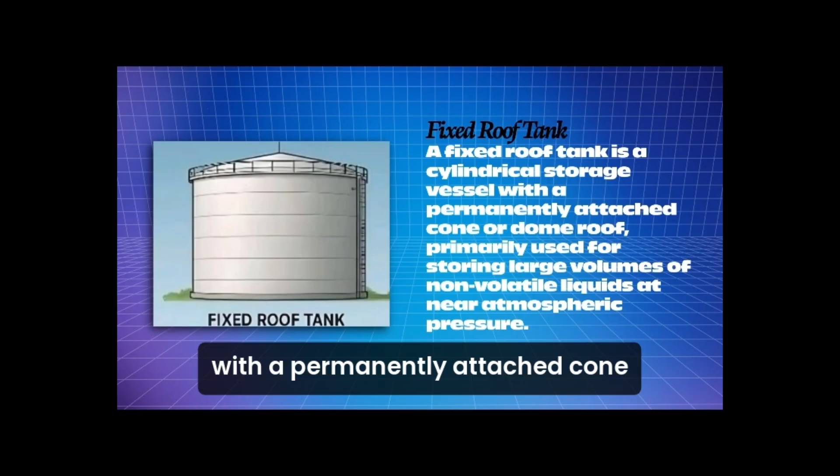A fixed roof tank is a cylindrical storage vessel with a permanently attached cone or dome roof, primarily used for storing large volumes of non-volatile liquids at near atmospheric pressure.

Application and usage. Its key application is in industries like petroleum, chemicals, and water treatment for storing products with a high flash point, such as crude oil, diesel, water, or certain chemicals. It is unsuitable for highly volatile liquids due to its lack of pressure sealing, as breathing losses can occur from vapor expansion and contraction due to temperature changes.

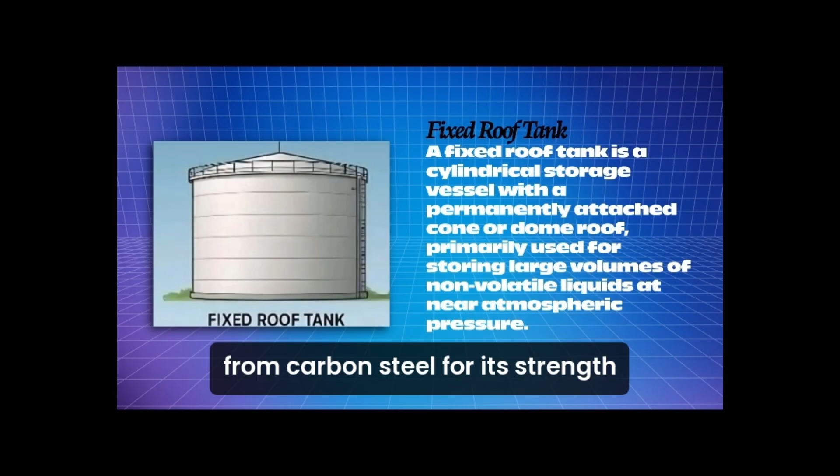Materials of fabrication. These tanks are almost exclusively constructed from carbon steel for its strength and cost-effectiveness. Stainless steel or special alloy linings are used for corrosive products. The roof and shell are typically welded steel plates, and the tank sits on a reinforced concrete foundation.

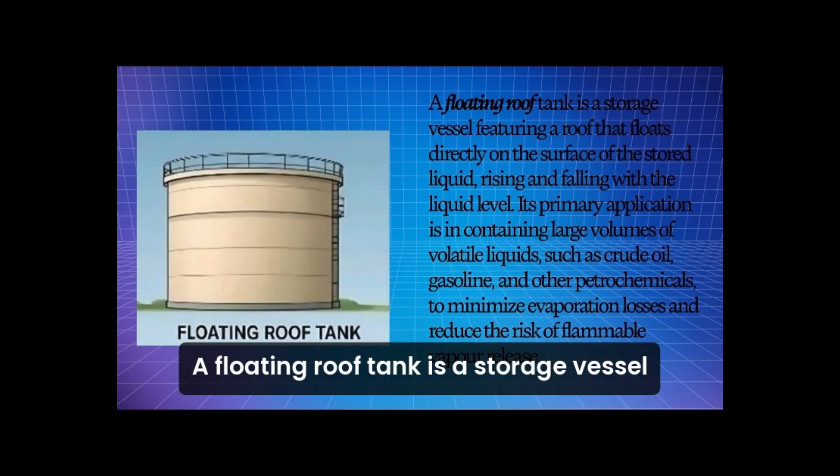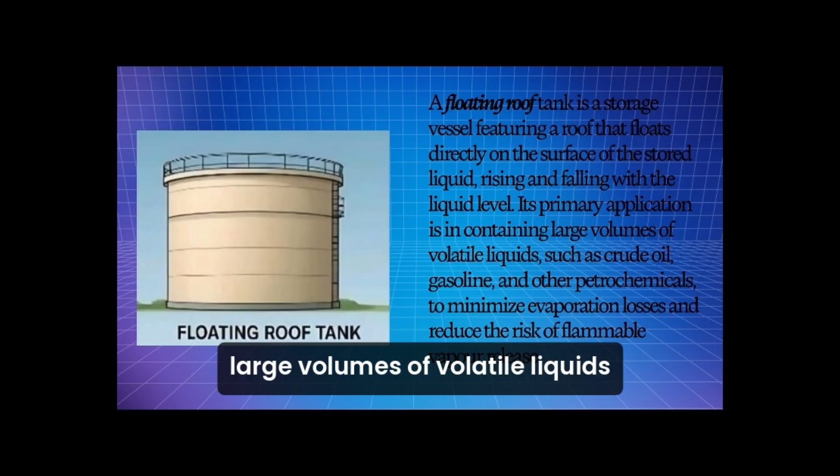A floating roof tank is a storage vessel featuring a roof that floats directly on the surface of the stored liquid, rising and falling with the liquid level. Its primary application is in containing large volumes of volatile liquids, such as crude oil, gasoline, and other petrochemicals, to minimize evaporation losses and reduce the risk of flammable vapor release.

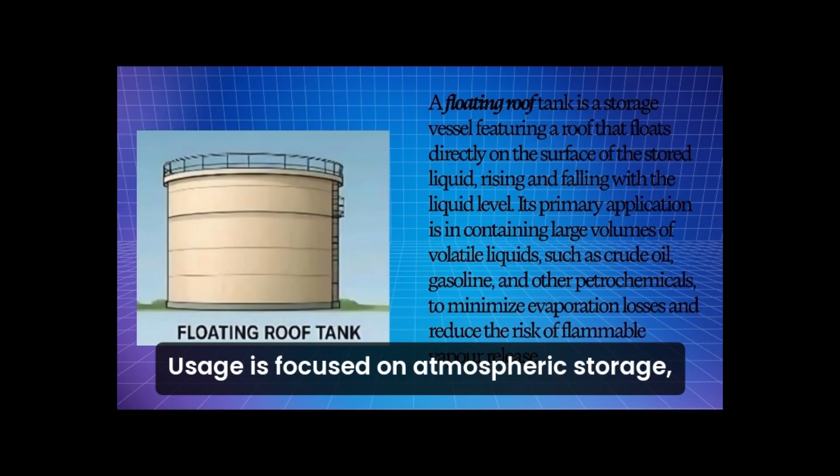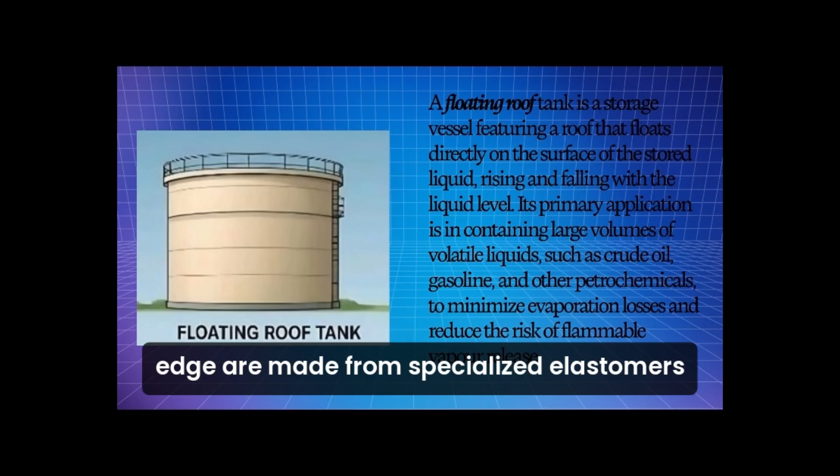Usage is focused on atmospheric storage, where controlling emissions and product loss is critical. The design significantly limits vapor space. Construction is predominantly carbon steel for the shell, deck, and pontoons. For corrosive services, aluminum or stainless steel roofs may be used. Critical seals around the roof edge are made from specialized elastomers or composite materials resistant to the stored product.

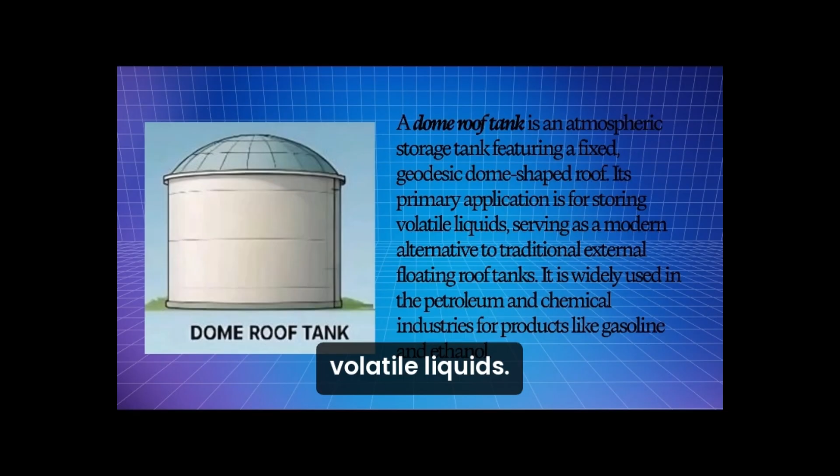A dome roof tank is an atmospheric storage tank featuring a fixed, geodesic, dome-shaped roof. Its primary application is for storing volatile liquids, serving as a modern alternative to traditional external floating roof tanks. It is widely used in the petroleum and chemical industries for products like gasoline and ethanol.

The key usage advantage is its enclosed design, which significantly reduces weather-related product loss and emissions compared to open-top designs, while avoiding the maintenance issues of internal floating roofs. The tank's main shell is typically constructed from carbon steel. The dome itself is often fabricated from lighter materials like aluminum or glass-reinforced plastic, GRP, to reduce structural load, supported by a steel framework.

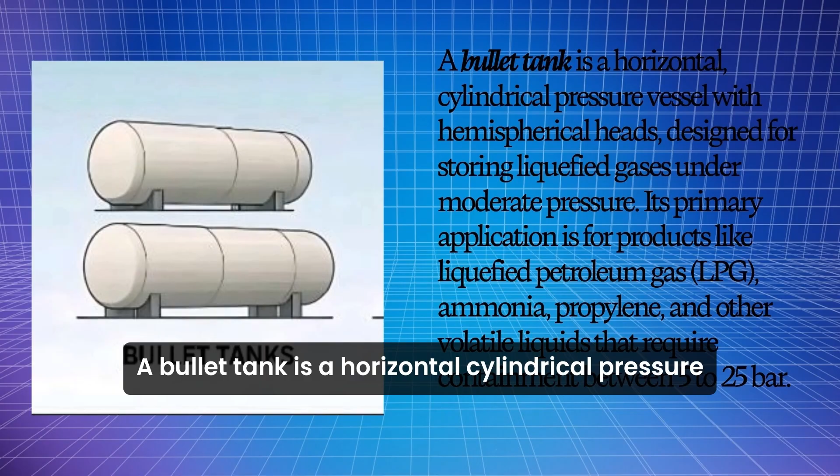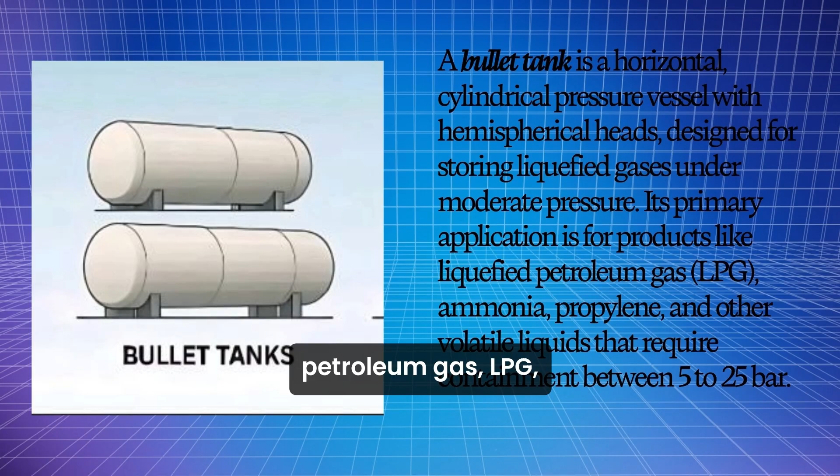A bullet tank is a horizontal, cylindrical pressure vessel with hemispherical heads, designed for storing liquefied gases under moderate pressure. Its primary application is for products like liquefied petroleum gas, LPG, ammonia, propylene, and other volatile liquids that require containment between 5 to 25 bar.

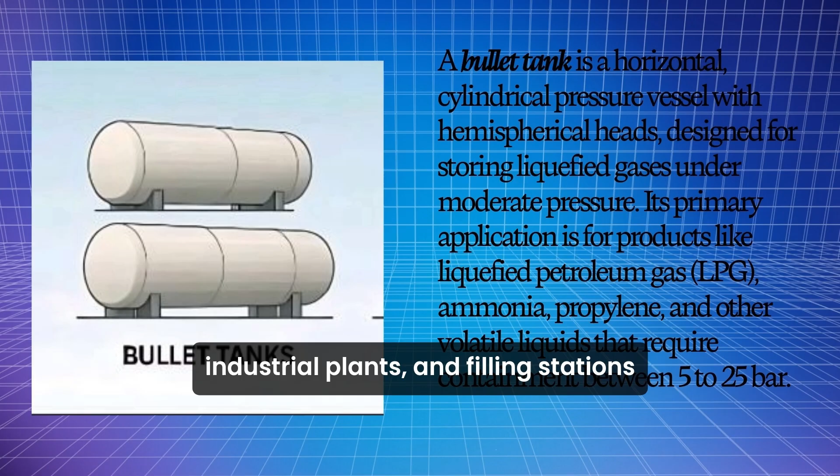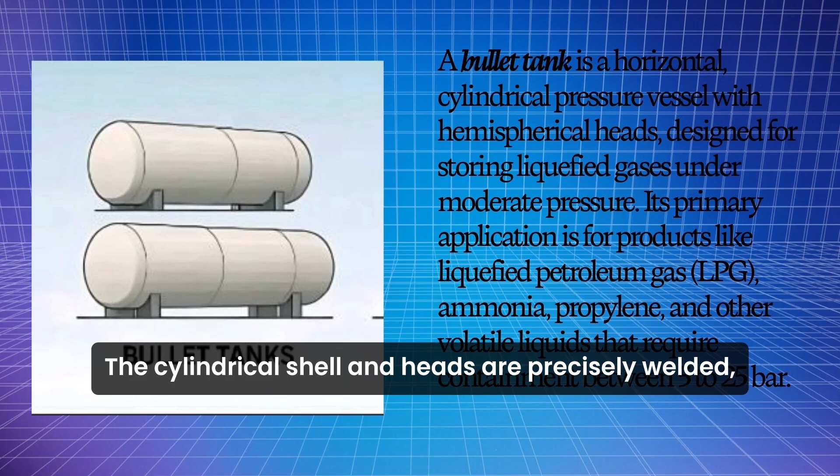These tanks are used in distribution terminals, industrial plants, and filling stations where smaller, pressurized storage is needed, as opposed to large atmospheric tanks. Fabricated predominantly from high-strength carbon steel or low-temperature carbon steel to withstand internal pressure and prevent brittle fracture. The cylindrical shell and heads are precisely welded, and the entire vessel is often mounted on saddles to accommodate thermal expansion and contraction.

A spherical tank, or sphere, is a pressure vessel designed for storing highly volatile substances at elevated pressures. Its primary application is in the petrochemical and oil and gas industries for products like liquefied natural gas, LNG, propane, butane, and other refrigerated gases.

The spherical shape is used because it offers the optimal volume to surface area ratio and distributes internal pressure stresses uniformly across its surface, making it immensely strong and efficient.

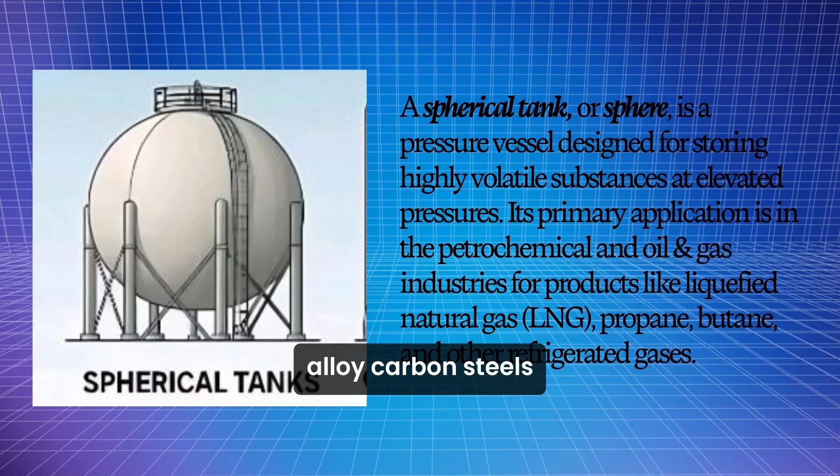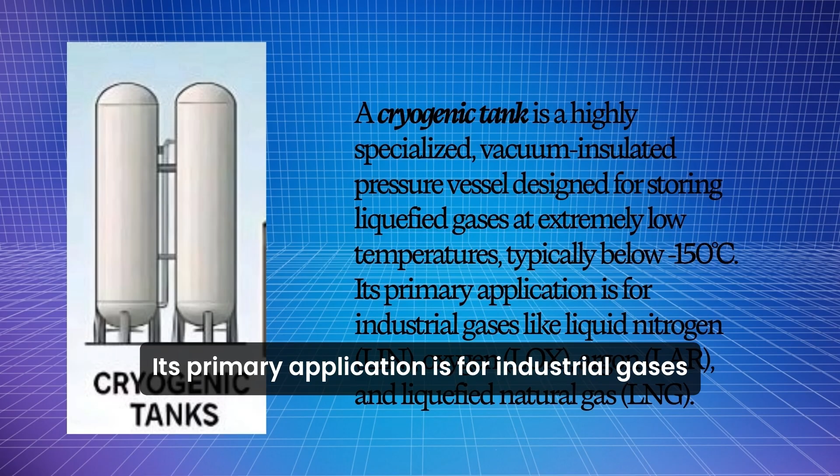A cryogenic tank is a highly specialized, vacuum-insulated pressure vessel designed for storing liquefied gases at extremely low temperatures, typically below -150 degrees Celsius. Its primary application is for industrial gases like liquid nitrogen, LIN, oxygen, LOX, argon, LAR, and liquefied natural gas, LNG.

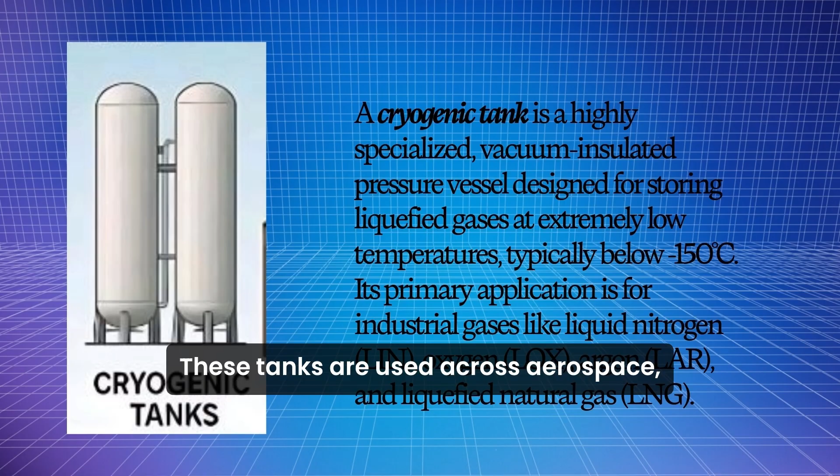These tanks are used across aerospace, medical, energy, and manufacturing sectors where large volumes of gases need to be stored and transported efficiently in their liquid state.

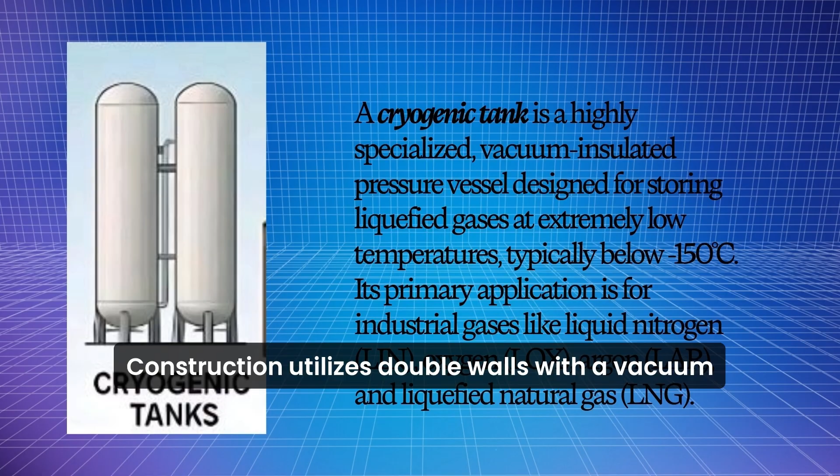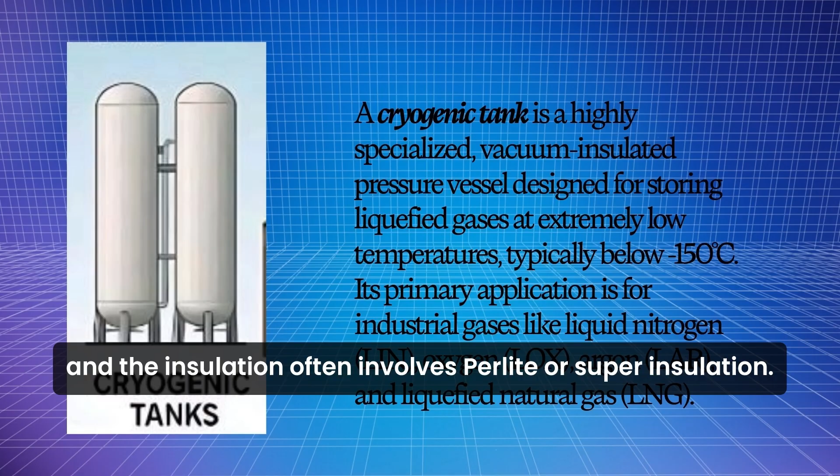Construction utilizes double walls with a vacuum-jacketed annular space to minimize heat transfer. Inner vessels are fabricated from austenitic stainless steel or aluminum alloys to retain toughness at cryogenic temperatures. The outer shell is typically carbon steel, and the insulation often involves perlite or super insulation multi-layer foil.

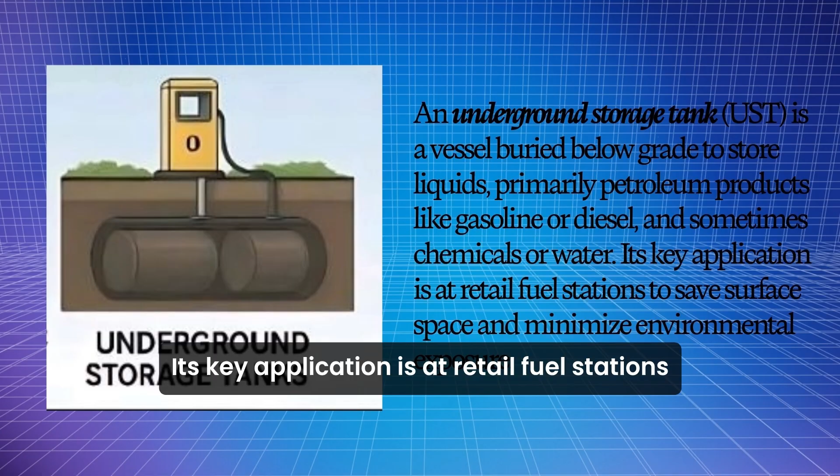An underground storage tank, UST, is a vessel buried below grade to store liquids, primarily petroleum products like gasoline or diesel, and sometimes chemicals or water. Its key application is at retail fuel stations, to save surface space and minimize environmental exposure.

Usage prioritizes safety and environmental protection, preventing spills, reducing fire hazards, and maintaining a stable product temperature. They are subject to stringent regulatory standards for leak detection and corrosion protection.

Modern USTs are predominantly fabricated from corrosion-resistant materials. The primary choice is fiberglass reinforced plastic, FRP. For steel tanks, they must be clad with a corrosion-resistant coating and be equipped with cathodic protection systems to prevent deterioration. The installation includes a secondary containment barrier for leak prevention.